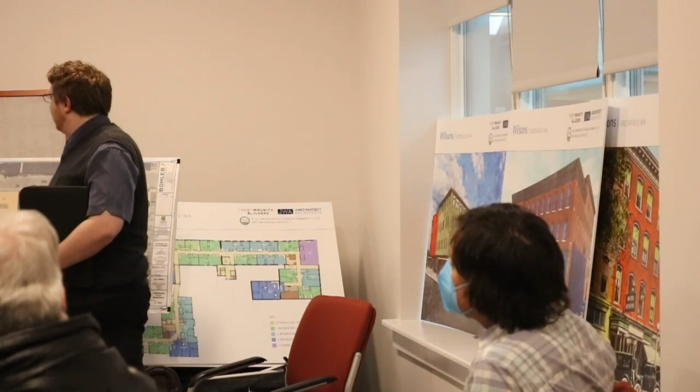As part of the renovation, we are proposing the demolition of the 1970s addition on the back of the original building. It doesn't exist on the first floor, but it does on the second. That back section is the 70s addition—this is the plan, and yellow marks the part that will get removed.

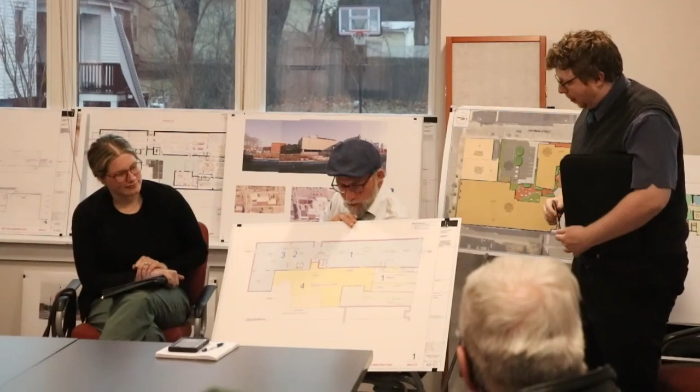So this is the 1970s addition. The current loading dock goes underneath it, on the second and third floors, but it does not exist on the fourth or fifth. So it'd be the removal of that, as well as the current elevator that serves all five stories, with a new elevator core built in its place housing 2 elevators instead of 1, serving the upper floors. The lower floors will still be served by existing elevators that remain specifically to serve the Greenfields Market.

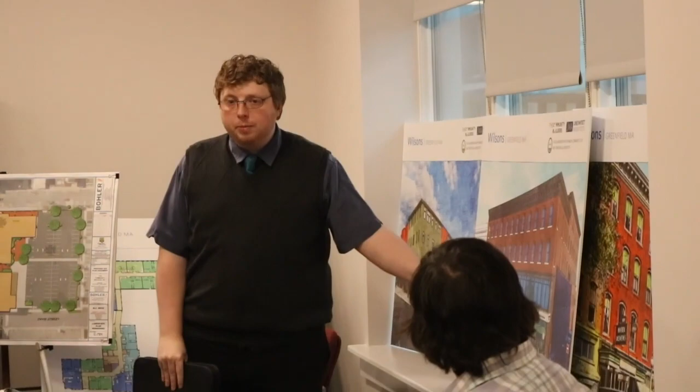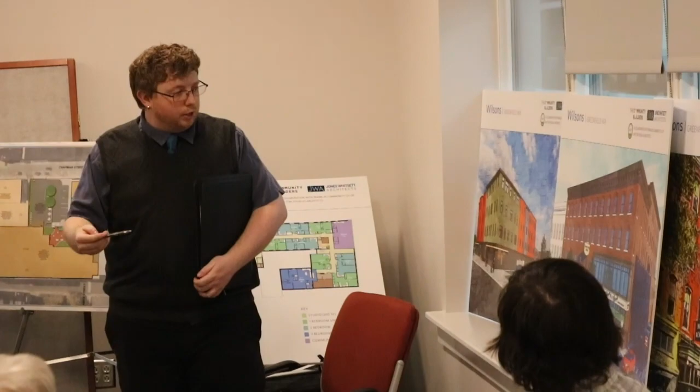At the front of the building, we're proposing restoring the 2-story storefront, which will be community space and a community room for the residents of the new project. We are also proposing the restoration of the monumental stair at the front of the building, which still exists behind the current storefront.

It's just been covered over on the second floor, so we are going to open it back up and restore it so that it'll be a means of entrance to the residential portion of the building. As part of the historic tax credit program, we're looking at keeping the majority of the interior halls on the upper floors where they still exist, and utilizing the spaces as much as possible without damaging the historic nature of the upper floors. The original hotel rooms still survive on those upper floors, so as part of the tax credit, there's a requirement to keep the original historic circulation on those floors, and the historic entrance down on Main Street.

So just to clarify, you're looking to rehab and reuse those old hotel rooms? Correct. Combining them to make residential units. Where we can, we are saving those walls as demising walls between the apartments, and where we can't save them, we intend on leaving part of the wall there to show a visual reminder of where the wall used to be.

The circulation and corridors will remain on the 4th and 5th floors where they are today, as well as all the existing door openings in those walls. Those will have faux doors where we are not using the opening, but will still remain looking as the original openings did. The transoms will stay as well. How many rooms were there in the hotel?

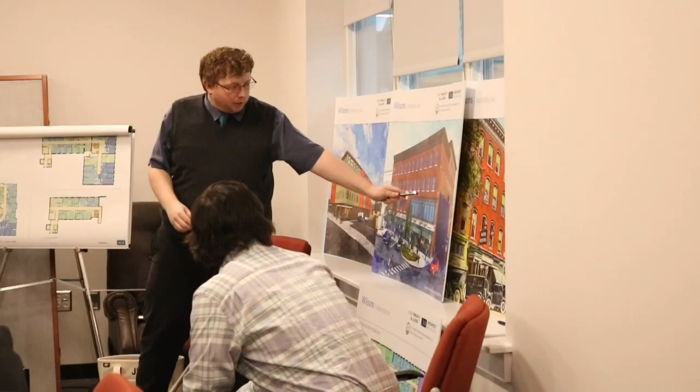So prior to when that— you say historic, what year are you talking about? What's your target year? So our target year is about 1920. This double-story storefront went up in 1912, and I believe was infilled in the late 1930s. The top portion was infilled in the 1930s, then infilled again in the 1940s, and in 1965 they put on the metal clad facade.

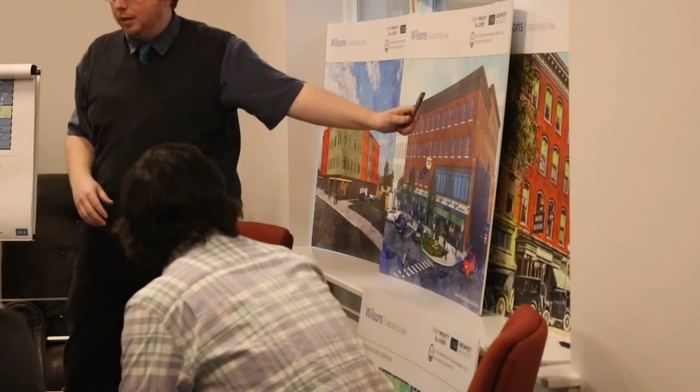So we are restoring it to the 1912 version, which is the double story. Before 1912, it had brick windows like everywhere else on the facade, except that's been completely removed. So it would be very difficult to try and match that and have it really look good. This is a much easier way of matching, and also really provides a nice monumental feel to the building.

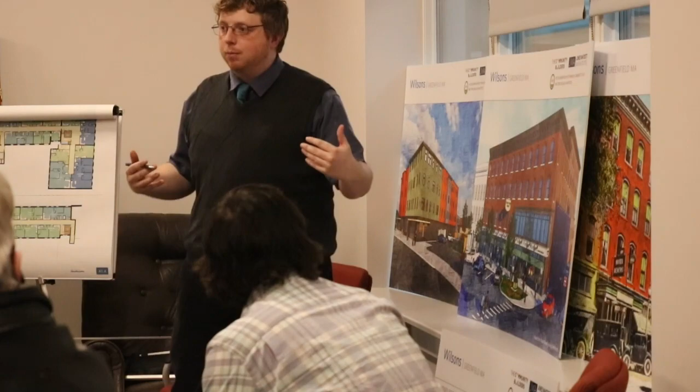So is it 1912 or 1920? 1912 is when this went up. But which target date? 1920 is the target? Between 1912 and 1930 would be the answer. Between 1912 and I believe 1938 is when that facade existed.

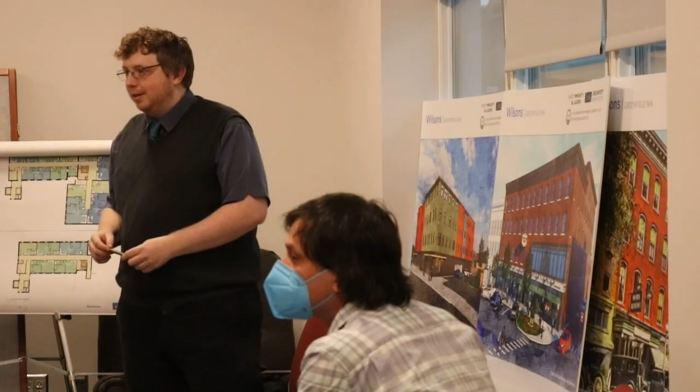Can you tell us the dates of the various blocks and buildings? The Main Street front was 1876, with Wilson's moving in in 1896. The 5-story section in the back is 1903. The original wood section there burned down in 1902.

In 1954, I believe, is when they bridged over or filled in the alleyway between this building and the building at the far back. Then 1974 is when they did a small addition onto the back, and 1977 is when they did the major addition onto the back. That was the American Hotel the whole time?

So there was a hotel and Wilson's at the same time? Yes, Wilson's entered approximately 20 years after the initial building was built, and initially it was just this storefront. Each time the hotel got rebranded, it expanded. Right, it was just the corner shop.

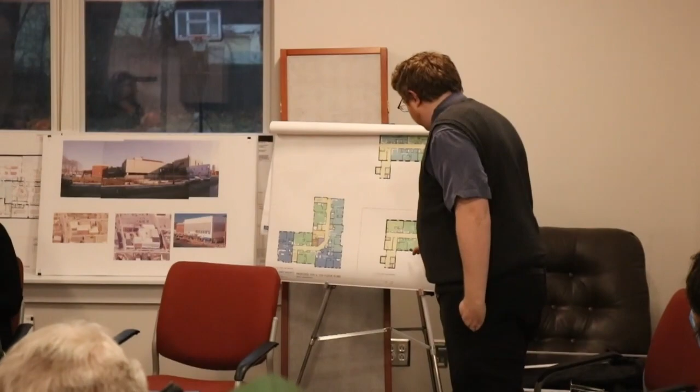So this is the 4th floor and the 5th floor. The partitions run this direction, and as much as possible we're reusing the existing doorways as entryways into the apartments, keeping the existing hall walls as they are, and where possible keeping the walls going this way, or at least demarcating where those walls used to be.

So there are historic tax credits involved - are there any Mass Historic grants or other funding? Currently, we just envision the Mass and federal historic tax credits as the historic funding for the project.

Can I just clarify the process? It's an elaborate process - Mass Historic will look at your plans at some point when you submit them, and then they'll come back with lots of comments and ask for our opinion. So in effect, what we're doing tonight is to start formulating the Greenfield Historic Commission's opinion. The thought is that this is just the beginning of the conversation with the commission. We're not looking for a letter of support this evening, but we'll be back as the plans are further developed, and certainly in advance of filing.

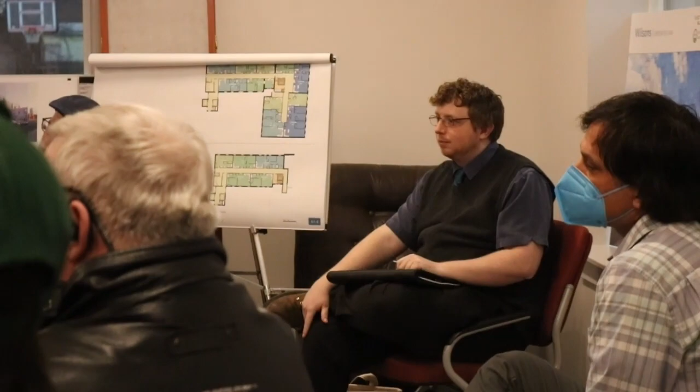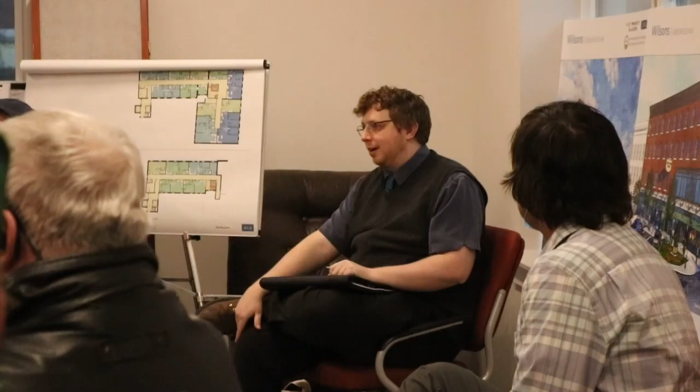Like the windowsills - were they modified when they put that on, or are they intact? I've heard those might have been. The stone sills on the exterior - they are mostly intact. It's hard to tell where those clip points occurred, so until we take off that facade, we won't know if they went through any of the sills.

And the second question - could you show where the elevators are, what you're doing with them? You said you're taking one out and replacing it with two. Yes, so this is where the existing elevator is that serves the 5-story section, and we're taking out that elevator core and building this new core that will have 2 passenger elevators.

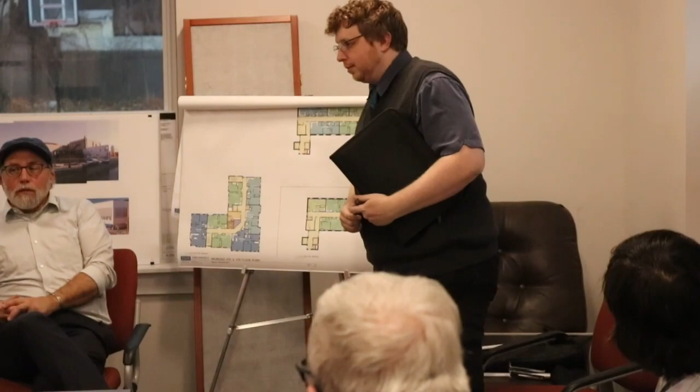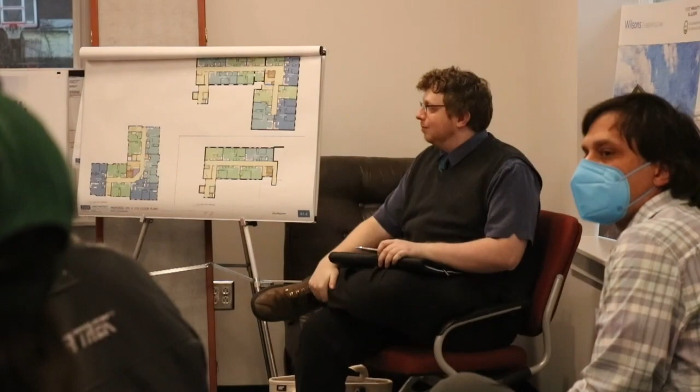I have a question - there's been some confusion about the use of the living quarters. Is it mixed use, mixed income, rental? The whole project is mixed use with commercial on the basement and first floor and residential on floors 2 through 5.

I guess what I'm getting at is there was an allusion that there might be low cost housing. This is affordable housing, mixed income, so it's going to be a wide range of housing available to those who already live in Greenfield. We want to offer housing to a wide range of folks.

Thank you, it was great to hear. One other question—that facade, the perforated skin—have you had any thought to preserving any piece of that for posterity? Often on these projects people will keep part of it integrated into the structure, or make it available to somebody else to hang onto, or just as part of the town's history, since that's been up there for quite a few decades.

There's no intent to preserve it on the building itself, but it's certainly one of those things we'd be happy to talk to other businesses or boards about preserving in some fashion. For example, in your meeting room you could take one letter and a panel and put it on the wall. Definitely a great idea—that's one thing we're actively thinking of ways to honor.

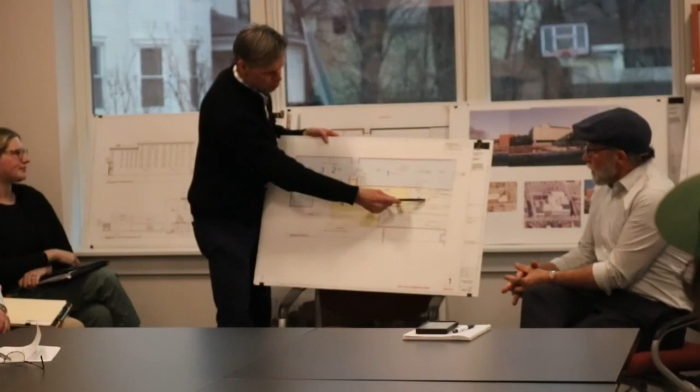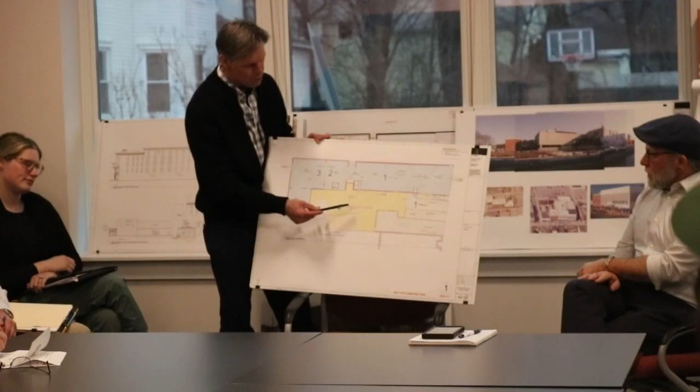So there were three elevators in the building: this one in the front, a little bitty one, then Kevin put in a bigger, more modern one here, and then there was the five-story elevator that went all the way up, accessing every single floor. We talked about removing that one. We're going to keep this one here—that's the one that meets building code—and we may keep this one, I'm not really sure yet.

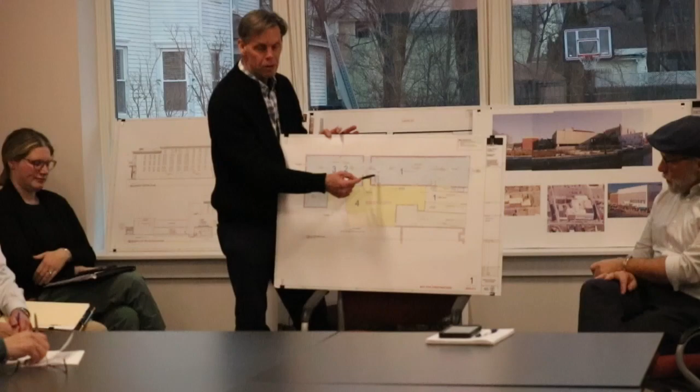We're thinking about having some basement retail, which will give John the opportunity to do a little bit different kind of sales down there. But it's still kind of up in the air, and we're still in the middle of designing all the equipment that's going to go in the store. They'll still maintain the entry in the front, and we'll have an entry in the back.

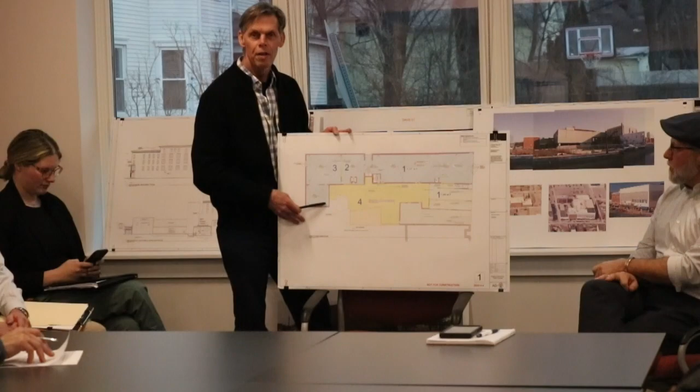We're going to take out these walls shown in yellow here—these are brick-bearing walls that we're going to remove. These back here aren't too bad, but these up here are solid brick-bearing walls between the existing tenant spaces. So removing those is not an easy feat, and it's going to push us into some earthquake structural moves that will happen in a few different places in the building.

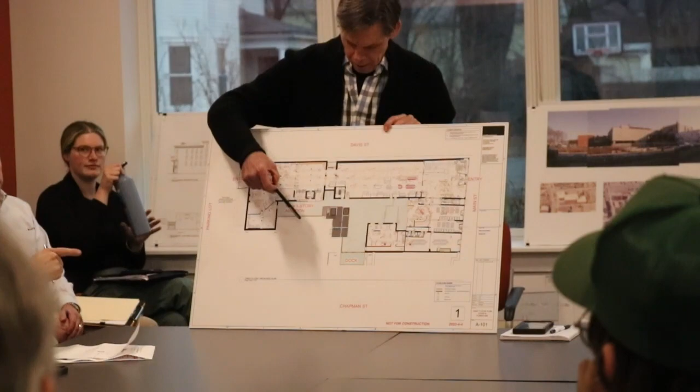For instance, let me get the new plan up here—this is our equipment plan. The blue part is what we're adding, a new single-story addition to the back of the building. And this is the five-story elevator lobby core that Henry talked about, which goes all the way up—that's all brand new, and this is the main entry to those upper floors for the apartments. This blue part represents our addition, and it's all going to be back-of-house space.

The circulation through here will involve building a bigger vestibule outside. There's only a little bitty vestibule inside now, but we need that interior space for retail. So we're going to build an outside vestibule with kind of a wooden heavy timber porch.

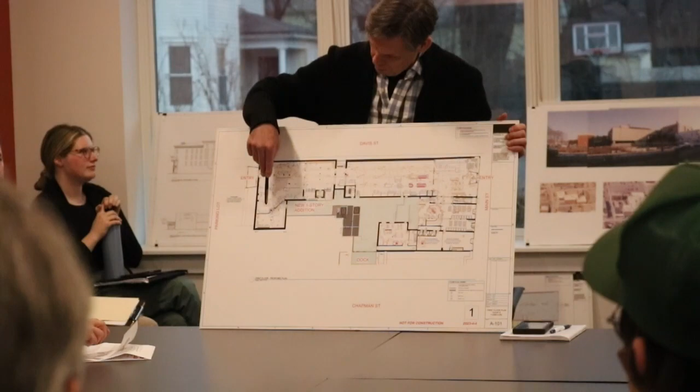You'll have cash registers here, dairy and produce here, and the elevator, the one I said would still be in use. We'll be able to access it from both sides.

This is the 5-story stair, and I'm not really sure what the fate of this is going to be. It'll give us good access between the basement and first floor, but to secure the co-op from the upper level apartments, we'll need some system that keeps people upstairs from coming down into this stair, since it would land them right in the middle of the space.

This will all be grocery, maybe a stair right here, a new interior vestibule, and we'll maintain the canopy that's protecting the entrance out there now.

This is the stair Henry talked about that they're going to rehab, bringing it back to its original, functional use and the way it was designed. We'll probably put a basement stair underneath there, and this whole area will be a cafe space.

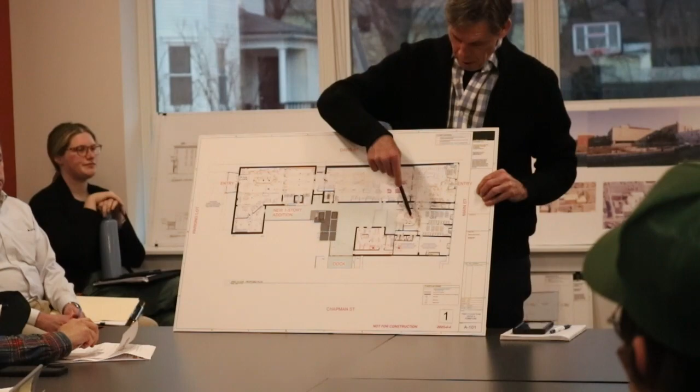John talked about a community room here, which will be a relatively separate space with some bathrooms. But this will be a much more open cafe space. It's not going to be your traditional cafe where you walk up to a waitress and get service, it'll be a little different from the norm.

You'll get grab-and-go food here, and you can order coffee and juice here. You pay for it at the register, then go sit down. We're really working hard to make this an active community space that people can see and be seen from the sidewalk.

We're rebuilding this entire storefront with all new entrances. This will continue the use John currently has of his little cafe at the front of his store, but enlarged and more activated.

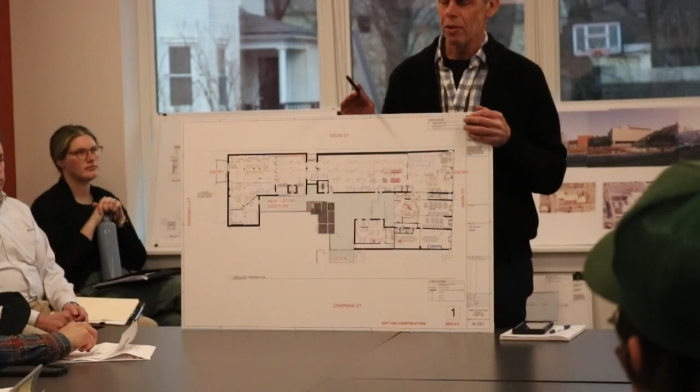We're talking about maybe having a lunch counter there. You see that in co-ops a lot of times, where they just stick it in the corner as a leftover space. We're really trying to make this an interesting, functional space that will help bring people in.

Tom, can I just add to that, since most of you are familiar with the store we're in. Sure. Third space is kind of part of our mission anyway, for everyone, as a gathering place for the community.

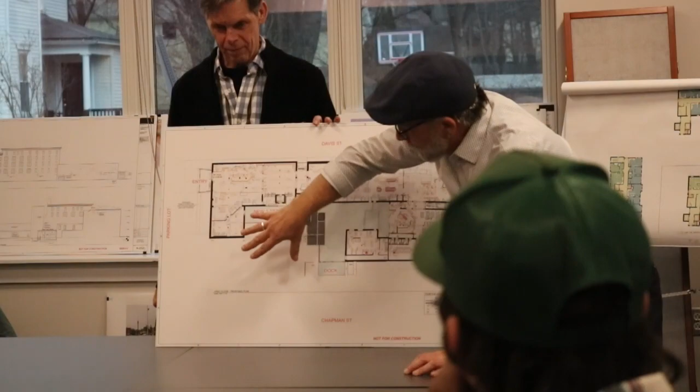One of the goals too, by doing this, is to create handicap accessibility on both sides that didn't exist previously, to let people flow in. And we already know produce is where a majority of our local suppliers come in, so you can see a substantial expansion into that.

And then when you get to these areas here, this is all about what it means to be in our community, because this is our community space. We know for the longest time we didn't have a handicap accessible community space upstairs. We rented a place at 170 Main, but it's too small.

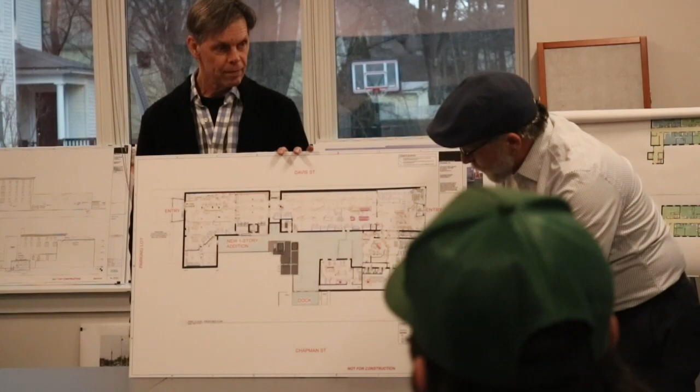We wanted to add a larger space and put in a test kitchen and a cooking station, so we can incorporate and open ourselves up to a larger portion of the community than we already serve. So this, even though it's not retail, is a huge component of the setup.

What we see here is the difficulty, usually you build a square grocery store, but this is more of an urban set. So the difficulty was how do we give as much accessibility and parking to everyone and still get a truck in, and then how do we service a long store?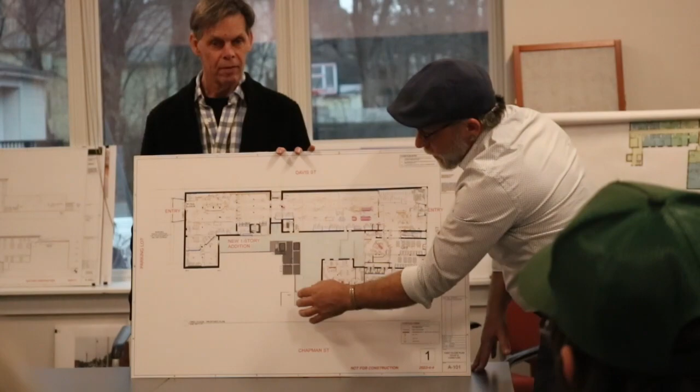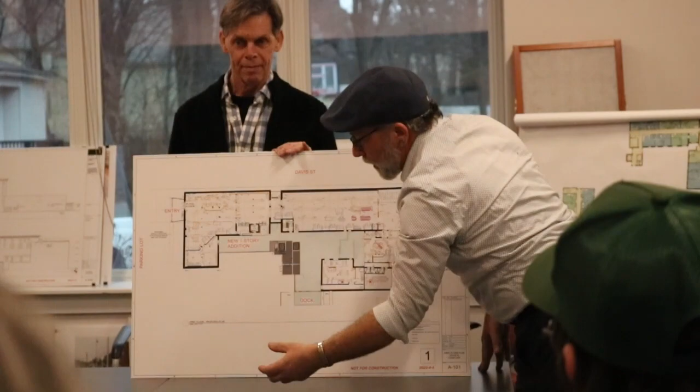That's really difficult, efficiency. The flow of goods and people is the most important aspect, and that's why you see a kitchen set up here. The design looks a little strange with the traffic flow, but this is all about flow of goods. For the housing component, there's a nice courtyard and an access point that will come through. So it really takes this whole sense of community, with foot traffic, prepared food, and knowing it's near a public parking space and a skate park, which makes this more dynamic, not just economically, but for a sense of space, which is what Tom was referring to in our design.

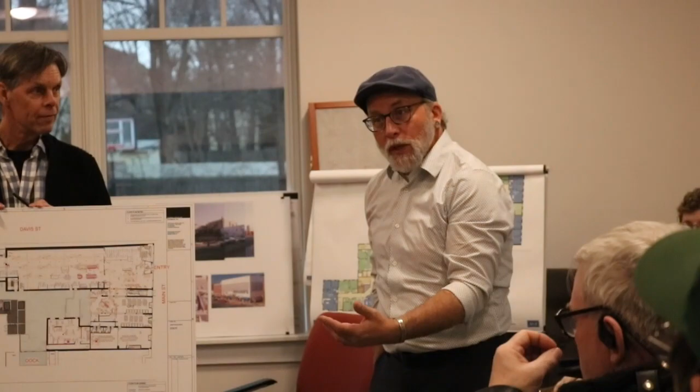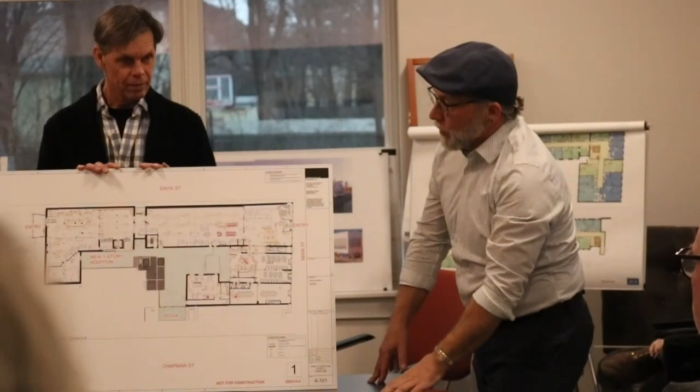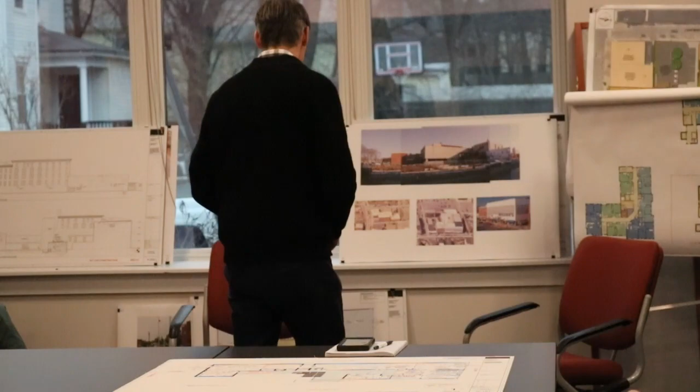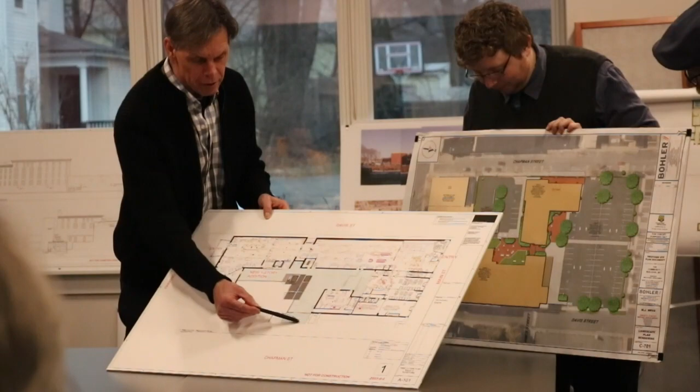So, what John just went over quickly, I didn't really mention. Remember Wilson's did have a loading dock back here. We're taking that down, obviously, so we've got to build a new loading dock back here. It's going to be smaller than what they had, but the trucks will back up from Chapman down onto this dock.

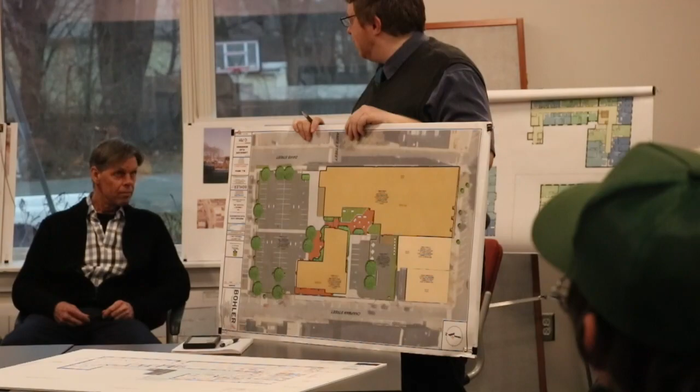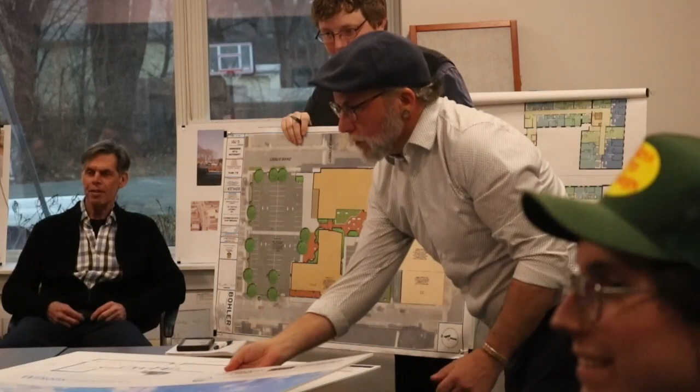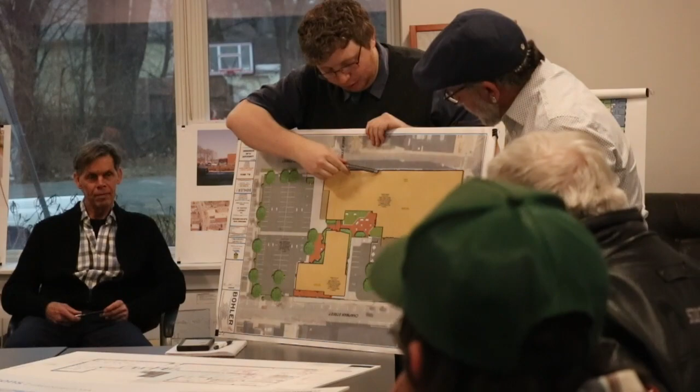Where do people enter, is there a side entrance too? The entrance on Davis Street is going away, so you'll just have the entrances on the back and front. And where do co-op people park? I know this is outside of our purview, but I can answer all that.

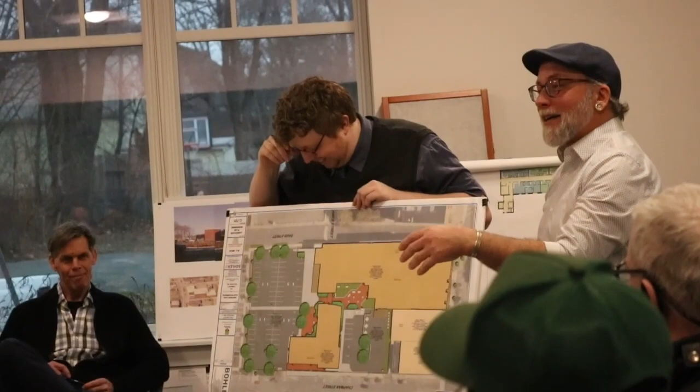We'll be utilizing the Wilson's old parking lot up by the Salvation Army at the time that we open. The back parking lot is shared between co-op patrons and residential, and I think John was referencing where your staff can park, up here.

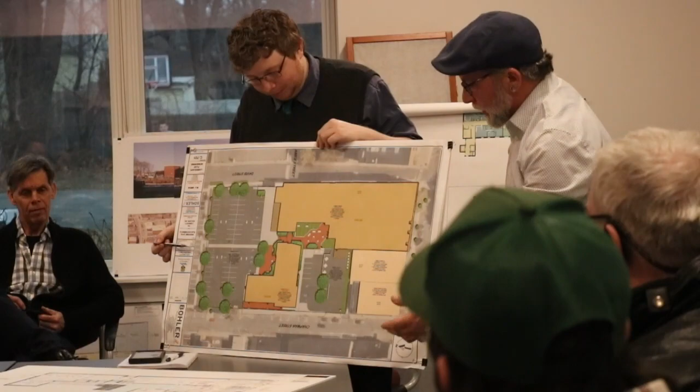This is a town lot, and we're working with the parking commission and the city on how to open this up to get better flow through Chapman Street as a whole, because it's already congested. We came up with a couple solutions, that's for a different meeting on how we might improve that. We're also looking for support on a first hour free in the parking lot for all downtown businesses, which solves problems for a lot of different organizations.

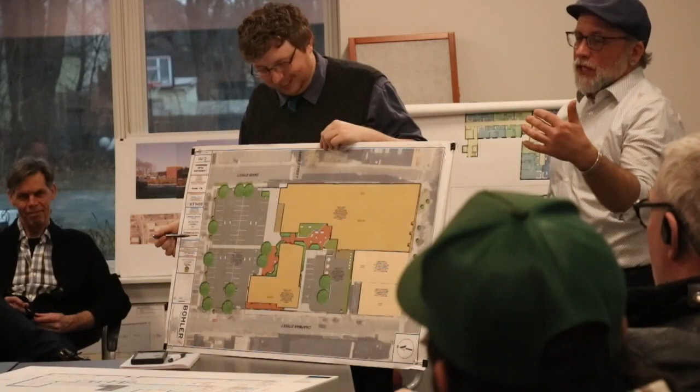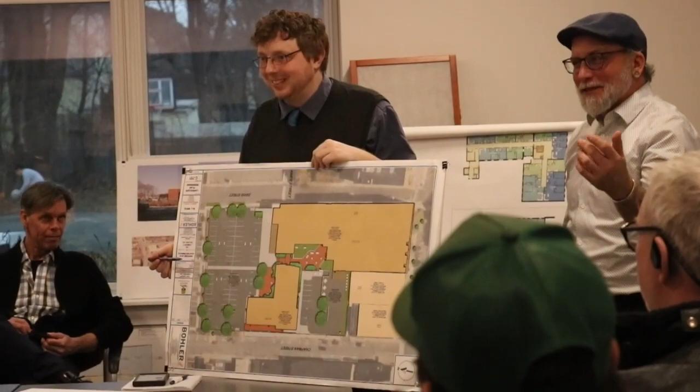Another question: across the street on Davis Street, the other side that used to be part of Wilson's as well, what's the plan with that? I would love to have that space, but it's not available at this time. I will continue to pursue that. Kevin and I are in constant dialogue all the time. So they're still holding on to that, right? Yeah, he still uses that space, and he's still utilizing the office building there.

What's largely your site plan holistically?

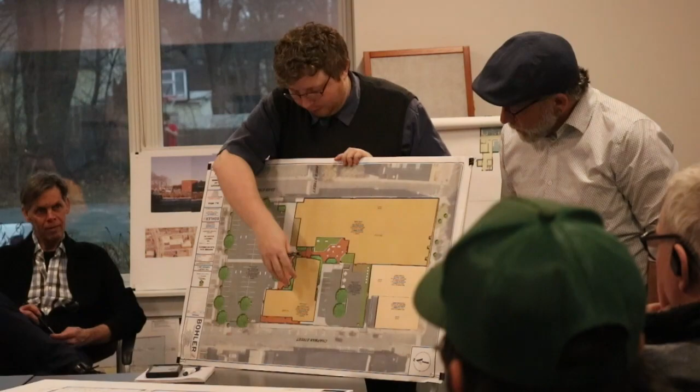So, for the co-op's parking, it's from this line up. The residential parking is from that line down. There's secondary parking for the management staff of the residential portion of the project.

Here with the loading dock access as well. The Greenfield Markets dumpsters are located here with the residential ones here. It's all going to be fenced in. There's going to be privacy fences along here for the courtyard, and also along in here to divide the properties from what's going to be a dispensary and the Taylor block.

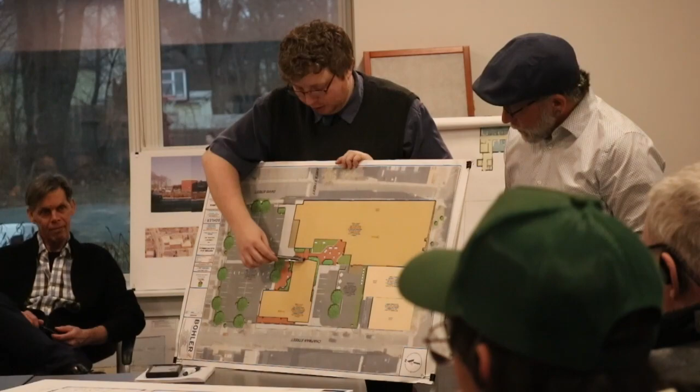This is the new addition that is being added on. At the back, it's going to connect across to the existing Wilson's building with a second floor connecting corridor that you'll be able to walk underneath to get into this more private courtyard space, with the main entry to the Wilson's part of the residential here, and to the new addition, and we'll have main access here.

There's also several storefronts along Chapman Street. There are 3 of them currently in the project that will be flexible for lease space that are still being finalized. And that's what I'm looking at here. That's what you're looking at there.

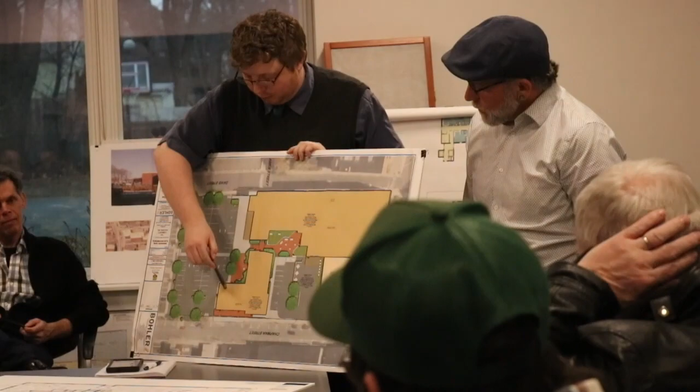As well as another entrance into the residential, and then finally right here we're actually providing a large indoor bike storage room that will have enough space for every resident to have bike storage.

Cool, yeah. I think it's great that there is retail in the new part. Yeah, I like that, on Chapman. A lot of the new projects I remember, retail. I remember the old retail that was there. Yeah.

I do want to comment, putting my other hat on as the new chair for Access to Disability Commission, that I'm very pleased that you're opening things up on both ends and making it easier for people, because 15% of Greenfield is disabled. That's a lot of people that use Greenfield downtown. I've heard many complaints over the last 5 years I've been on the commission about entry into some of the Greenfield stores. So I'm happy to see that you're making a difference and adding accessible entries on both ends of the building.

Yeah, it's one of our core issues right now. I mean, besides the fact that we're just too busy and we've really beaten up that old JCPenney building more than it should be, we want to make sure that building is available to become something else that also enriches the community. That's one of the biggest impetus to making this move.

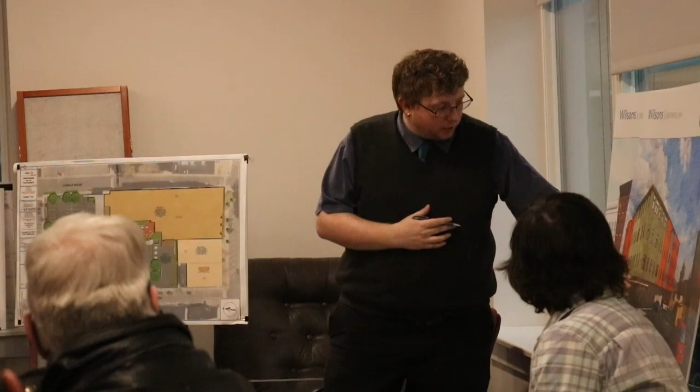Punched opening versus bands of windows, keeping the facade within. The lower half of this facade is currently envisioned as dark brick, with a fascia band transitioning it to the upper floor materials, as well as a cornice at the top of the building that, while still modern, will call out the much more historical cornices that exist on the Wilson's building.

It looked like from a parking perspective, you're a little short on what it's going to require for the residents. We are, at least according to town bylaws, in the central commercial district, which actually has an exemption for parking, so we do not have to meet the minimum amount. We're providing as much as possible, but you are correct, we are not at the full requirement. If we were elsewhere in town, we would need more parking.

About how many resident parking spaces? I believe we're at 38, fully built out. But all the bicycle parking you want. No parking is under the purview here, but we have a much higher, almost double parking rate available than we see utilized at similar properties in a downtown core.

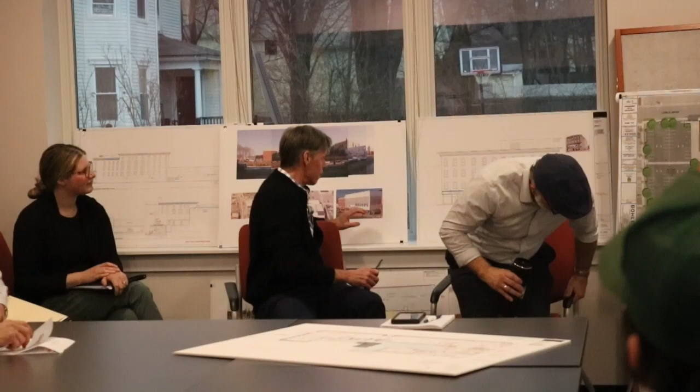And then I interrupted Tom because I get all excited when I look at this. Do you have anything more that you wanted to show? We just have a little bit more detail on the front facade. It's not in color, but this is the front facade.

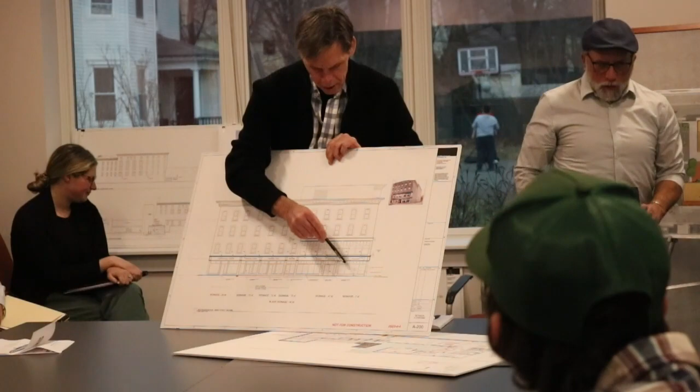Our responsibility is from here down, but we're going to rebuild that sign band that was existing here. There's steel columns behind the storefront in these locations, so we were going to put decorative pilasters in front of them. This storefront here is going to be aluminum, probably like a bronze, dark medium gray storefront to match. We have to go with the color that was there originally, which we don't know exactly, but it's dark, so we're not going to do a white storefront.

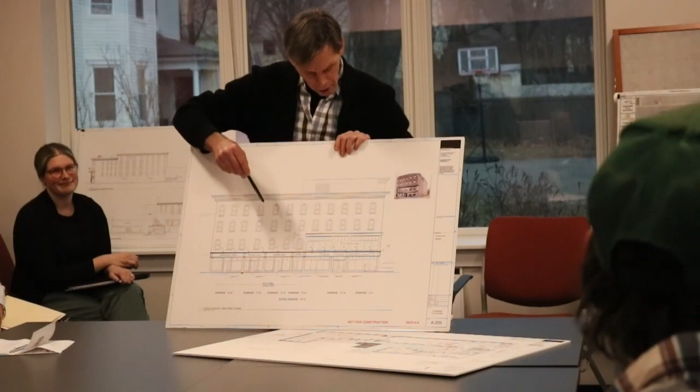This section right here, this big giant retail window on the second floor, Henry is charged with designing that, since our dividing line is right there. I didn't draw it exactly right, and we have to work to coordinate this together, but they will be the same style.

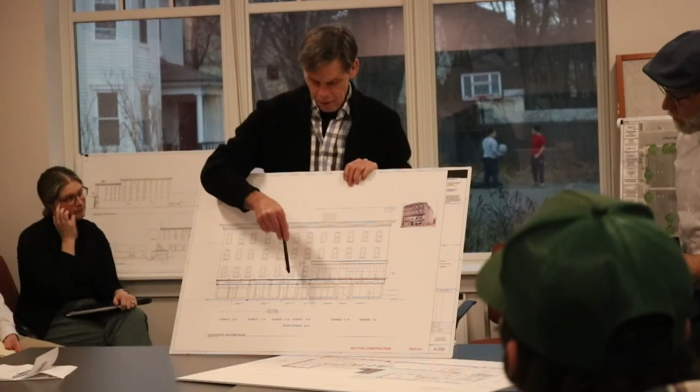A few changes we're going to make from the original storefront: these were really big pieces of plate glass. I think for cost reasons and replacement reasons, we're probably going to split what was a big piece of plate glass into two pieces. Obviously all this has to get approved by the National Park Service, and we have detailed sections showing the relationship of this sign band to what we think was there before, and the relationship of the window heads to what we think was there before.

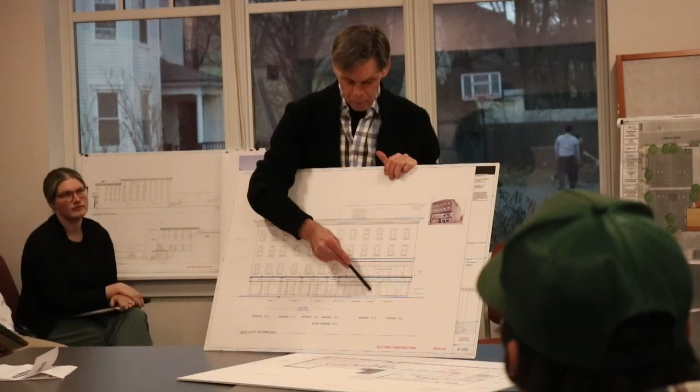But it is going to get modernized. One big change is going to be the store having a power-operated door, so that'll be a little bit different style than what was there originally and what's there for Wilson's right now. And again, that's the central stair to the old one. These are the three identical storefronts. The center part, the entry door, is the same, and the windows on either side are different sizes.

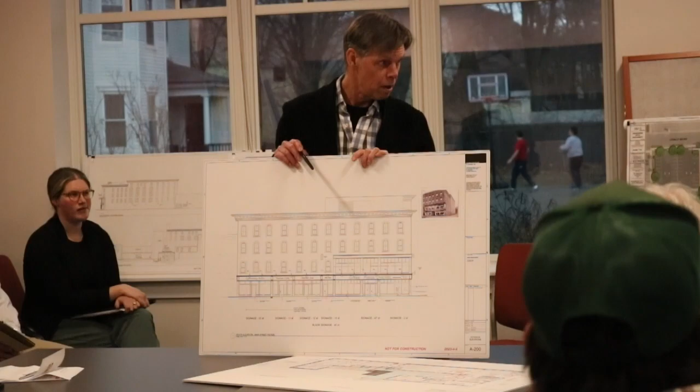The columns—yep, those are original columns to the building. Are they iron, cast iron behind? What's behind here is an original steel column; the original steel was riveted, but it's had all these various components welded to it. Like when they created this big picture window here, there's no beam right here going across supporting the division between these two floors.

So the real bearing point for this entire storefront is way up here, and those columns go all the way up through. We haven't been able to do full demo on all this stuff, we've just been able to punch little holes, so you don't really know what's going on until you dig it open. I'm just wondering if those columns might have any decorative features to them at all.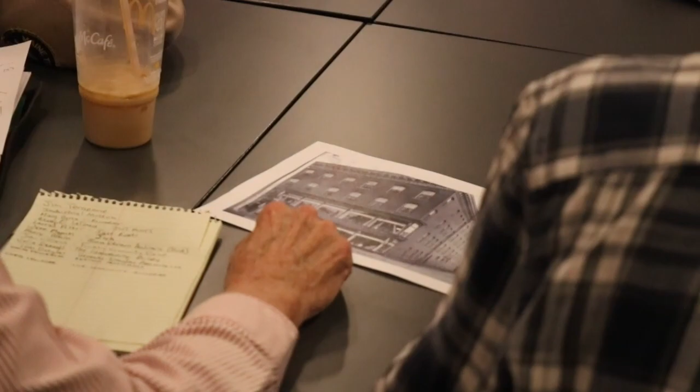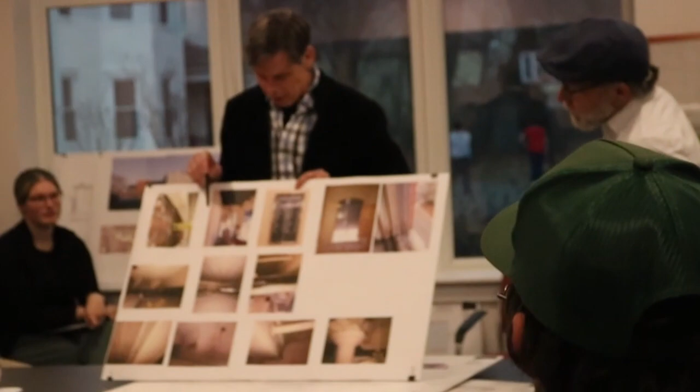But there are some interesting things we discovered along the way. There are pictures above the old Wilson's storefront or ceiling, drop ceiling. There's a tin ceiling up there that's in really great shape. There are a few places where it's been torn up, but the ceiling in the front part of the Wilson space is like a big coffered ceiling. It's got crown molding, tin crown molding, cornice all the way around in a coffered way. I don't have a plan of it, but there's a lot of beams in there that cross each other and form this great pattern on the ceiling.

So you can see that's the ceiling there. You can see the cornice that exists above there. There are various pipes along the way that penetrated it, and we're going to have some pipes that run below this.

We're still working on how we integrate all of our heating and air conditioning in there too. That's going to be a trick. Work in progress, but super cool.

So that's one of the columns right there. This is a cast iron column that's inside of there. Will that be visible? Yeah. No, the ones in the front were not this style. The ones in the front were like 3 or 4 different pieces of steel riveted together, kind of like a box girder — who knows what they originally were. They could have been replaced when this big upper level window was put there. We don't know. It's more like a girder than a column.

It is. And it's clear you've done a bit of work looking at old photographs and things like that. For us, what really matters is looking across the street at that facade and trying to match it. I think at the end of the day that's what we're going to be really looking at, and whatever research you guys can do to unearth as much as possible to meet that original 1920s, 30s look — I think that would be the target.